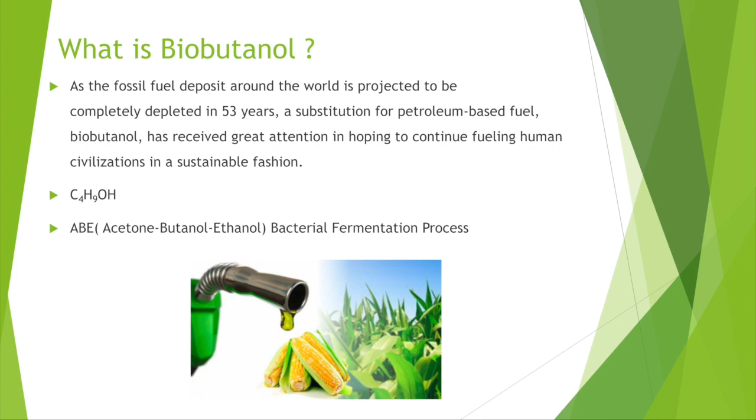From historical data as presented by the U.S. Energy Information Administration, a six-fold increase in biofuel production took place from 2001 to 2011. Since then, biobutanol has been intensely investigated and its market is forecast to reach $9.9 billion USD by 2020. The significance of biobutanol production is its environmental effect to reduce greenhouse gas emission by 20%.

Having similar properties and energy content to gasoline, it can be used in its pure or blended form in any concentration with gasoline. Therefore, biobutanol may be the best hope in combating fossil fuel depletion, rising oil prices, and global warming. Environmental impacts, social impacts, and safety hazards are considered for the proposed design.

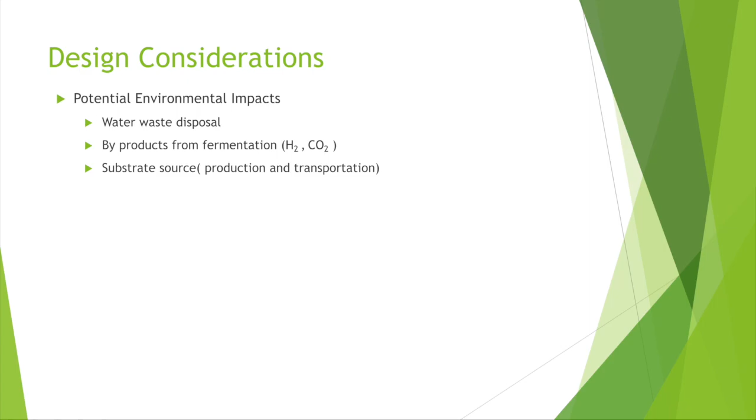Environmentally, wastewater disposal and treatment of the hydrogen and carbon dioxide gas produced need to be considered. Corn production process and transportation also need to be considered. Moving on to the social aspect, employee safety and public acceptability of substrate choice, particularly if the substrate is also a food source, should also be considered.

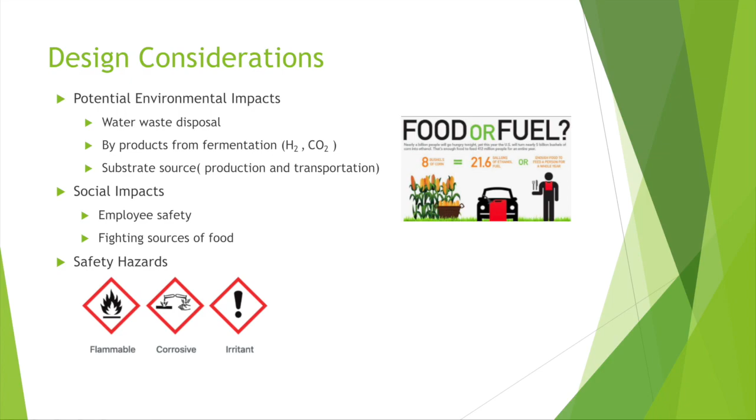Safety hazards. Butanol is harmful if swallowed, irritating to skin, and may cause drowsiness. Exposure may occur during cleaning, maintenance, transfer, sampling, and analysis. Because of this, workers should be wearing tightly fitting safety glasses, boots, neoprene gloves, and a respirator if ventilation is insufficient.

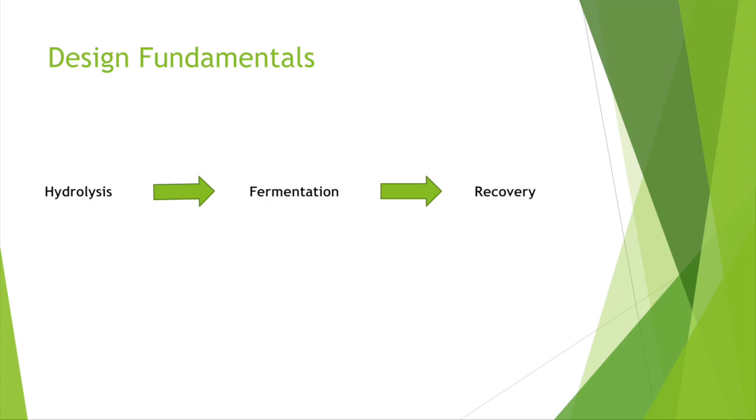The ABE production process can be summarized in 3 steps: hydrolysis, fermentation, and recovery. Acid hydrolysis and enzymatic hydrolysis gelatinize cornstarch and cellulose in the corn kernel. The main goal of the hydrolysis step is to release fermentable glucose by breaking down the carbohydrate chain.

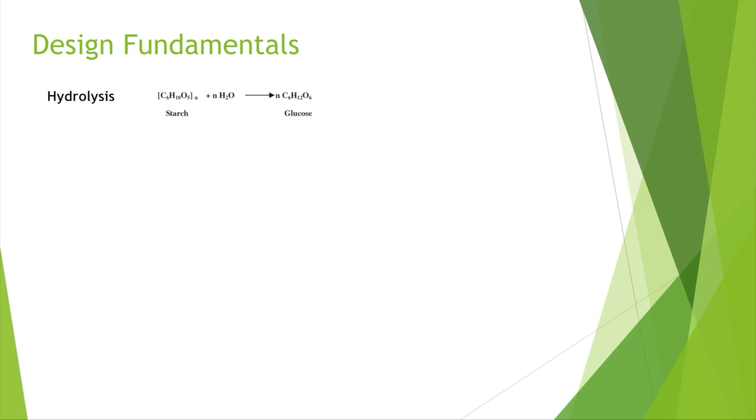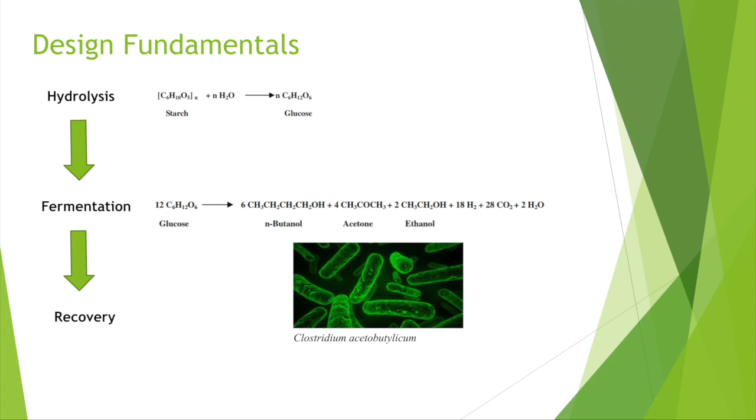In the fermentation step, glucose is taken in by the Clostridium acetobutylicum bacteria cells and fermented anaerobically to ABE. The fermentation step yields 3 parts acetone, 6 parts biobutanol, and 1 part ethanol. Moving on to the recovery stage, ABE separation is done through a system of distillation columns, taking advantage of the difference in volatility and boiling points. In the proposed design, this recovery approach is included in the plant downstream.

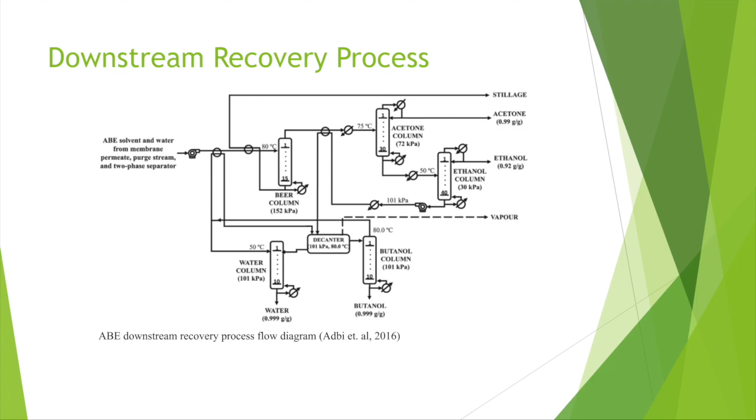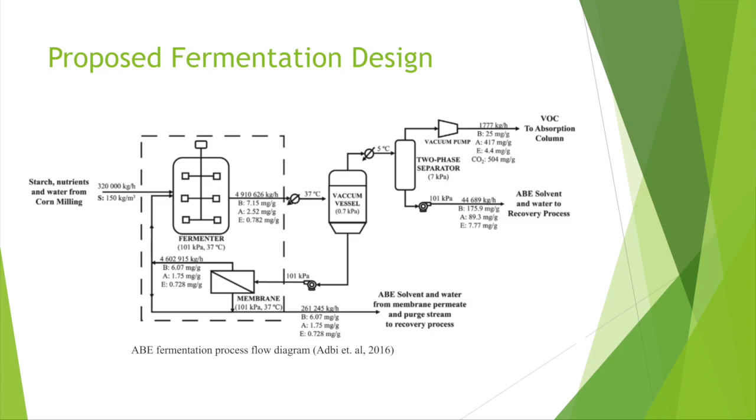The top stream leaving the separator is enriched in volatile organic compounds and compressed for absorption. The bottom stream leaving the separator is the ABE solvent stream and is also compressed for recovery in the system of distillation columns. To reduce the cost of fermentation substrate, one possible alternative as proposed by Burgen et al. is using renewable lignocellulosic biomass such as corn stover instead of corn kernel.

Lignocellulosic biomass is a favorable feedstock since it is the most abundant renewable biomass resource on the planet and it can avoid direct fuel versus food competition. The typical conversion process from lignocellulosic biomass to butanol involves pretreatment, detoxification, and fermentation. However, there's a trade-off for low input costs, as during the pretreatment process a number of fermentation inhibitor compounds are produced due to extreme degradation of lignocellulose, which may negatively affect fermentation yield.

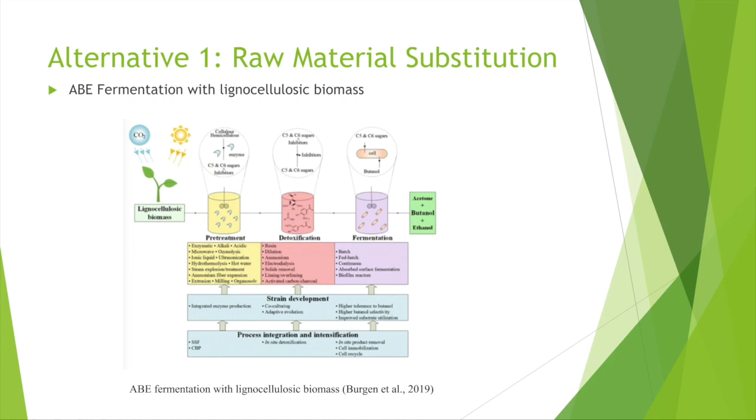Another possible alternative is adoption of a biofilm reactor and resin adsorption packed bed in the downstream process to increase butanol recovery. Liu et al. used KAI cross-linked polystyrene framework resin to recover biobutanol from fermentation broth. Compared to the conventional process, the alternative dramatically improved productivity and reduced the energy consumption, as well as water usage in biobutanol production. The reactor has a longer service life and is economical to operate without additional effluent centrifugation.

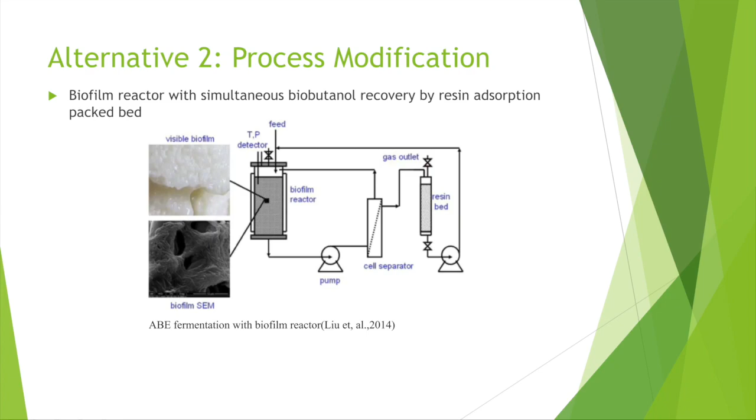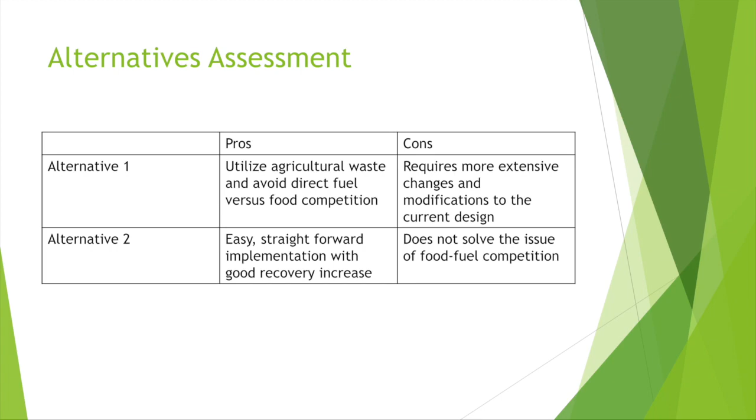The two proposed alternatives are compared based on two criteria: source of substrate and implementation to the current design. Based on source of substrate, Alternative 1 is more ideal as it avoids direct competition between fuel and food source. Based on implementation to the current design, Alternative 2 is more ideal for its simpler and straightforward addition to the downstream recovery process. Alternative 1 is chosen as we feel that avoiding food and fuel competition is more important than the complexity of the alternative process implementation.

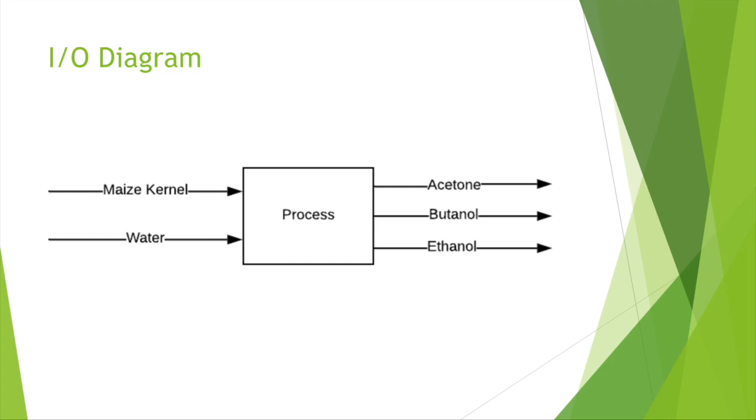An input-output diagram is presented. The input materials are maize kernel and water, and the output materials are acetone, butanol, and ethanol. Based on input-output level analysis, the net profit of the proposed design is $15.6 million, and the break-even TCI is $156 million, assuming a minimum of 10% ROI.

The market for biobutanol includes fuels, solvent, surface coating, and chemical synthesis intermediate. Other revenue-generating streams include byproducts of fermentation, such as carbon dioxide and hydrogen gas, and waste mash. Upon separation, the carbon dioxide and hydrogen gas can be compressed and made valuable. The waste mash is rich in proteins, organic acids, and vitamins B2 and B12, as well as saccharides, making it an excellent animal feed.

Referring to the cost breakdown diagram, it is observed that the proposed design requires much more input material. However, the output rate of all three products is also significantly higher compared to the conventional method, generating a 380% increase in overall annual revenue. This shows that the proposed design has great potential in overall production profitability and efficiency.

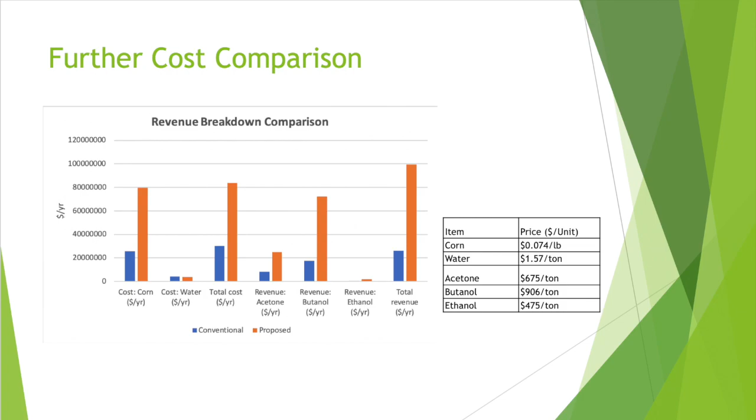To assess the viability of the project from an economic standpoint, a rough estimate of the planned TCI is $217 million, yielding an ROI of 7.5%. However, by increasing the biobutanol unit selling price by 4 cents while keeping all else constant, the break-even TCI is now above the estimated TCI, giving a 10.02% ROI.

To sum up, from an economic perspective, the project could be viable if the biobutanol price is slightly higher than the current market price. Other options include decreasing production costs, for example, picking cheaper equipment, to maintain a relatively lower TCI and the desired ROI.

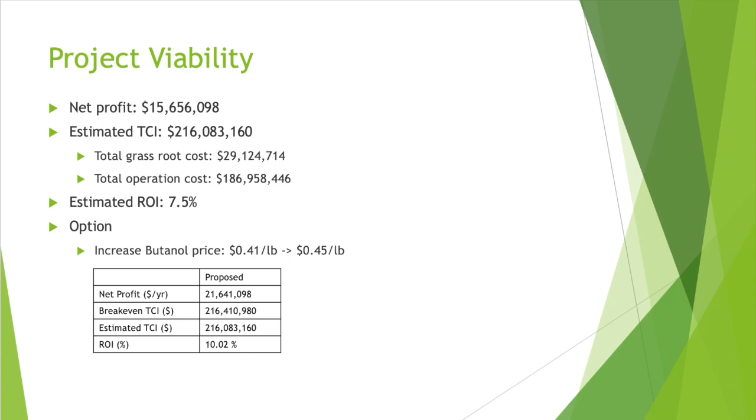In conclusion, the project is recommended to be considered in more detail for several reasons. First, economically, for a minimum ROI of 10%, the proposed design is viable when the biobutanol selling price is at least $0.45 per pound, on the basis of a biobutanol production rate of 177 million pounds per year. If increasing the selling price is not ideal, the proposed design may be improved by adopting Alternative 1 to reduce raw material costs.

Second, environmentally, using corn-based biobutanol as an alternative to petroleum-based gasoline is extremely beneficial and valuable as it releases fewer greenhouse gases and is renewable. Third, socially, developing and incorporating the biobutanol production process creates substantial job opportunities, particularly in the agriculture sector. Going on from here, possible next steps include genetically engineering a more tolerant strain and technologies to increase biobutanol recovery and yield.